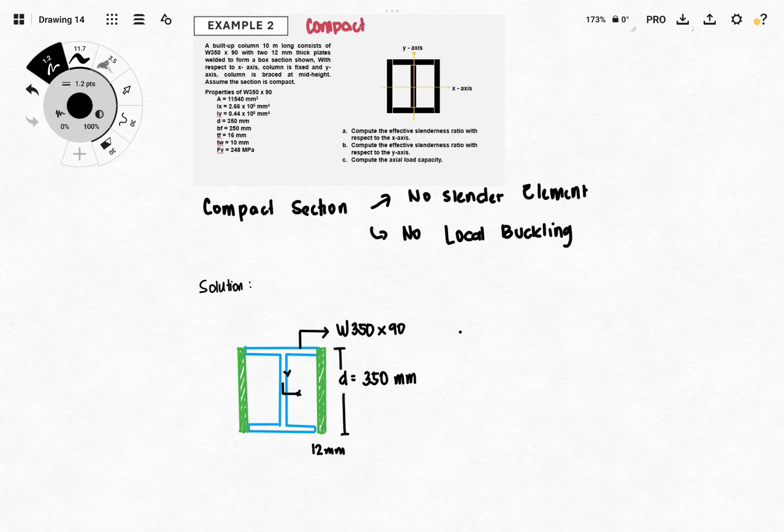Okay, so for our second problem, this is another compact section. We assume no local buckling happens first. So if this happens, all elements of the wide flange, and since this is a built-up member, the plates on the sides are also compact, so they are non-slender, no chance of local buckling. Again, the limit state is still general buckling or yielding. For these kinds of problems, if it's a short column, yielding is the limit state, the mode of failure. But if it's a long column, then it's general buckling.

Now, for this problem, a built-up column which is 10 meters long consists of a W350 by 90 with two 12 millimeter thick plates welded to form a box section as shown with respect to the x-axis. The column is fixed on both ends for its x-axis, and for the y-axis, there's a bracing at mid-height. Again, we assume that the section is compact. The properties are also given. So we need to solve for the effective slenderness ratio with respect to the x-axis, compute the effective slenderness ratio for the y-axis, and the third one is the axial load capacity based on the critical slenderness ratio.

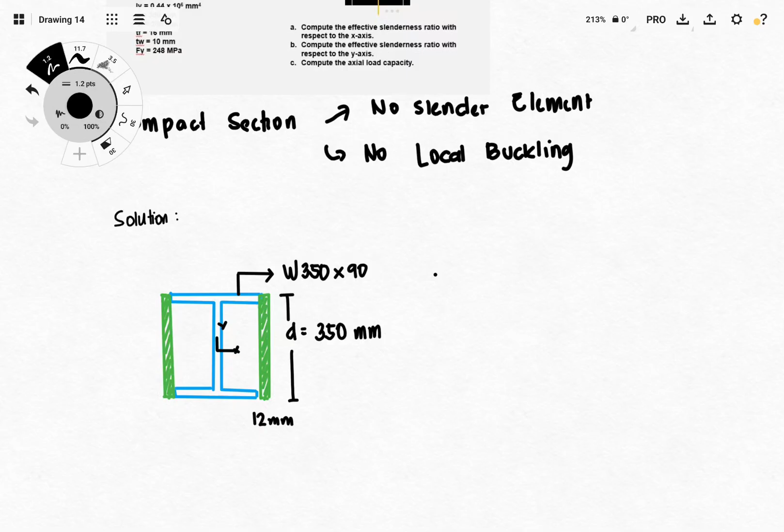So to solve this problem, we need to solve for the built-up properties first in order to get the critical slenderness ratio. Okay, all the information for the wide flange is provided. But now, since it's built-up, we need to include the inertial properties, the area that the plates also contribute.

So for the built-up properties. Okay, so our goal is the formula for slenderness, KL over R. So we need to solve for the radius of gyration, and our formula for radius of gyration is square root of I over A.

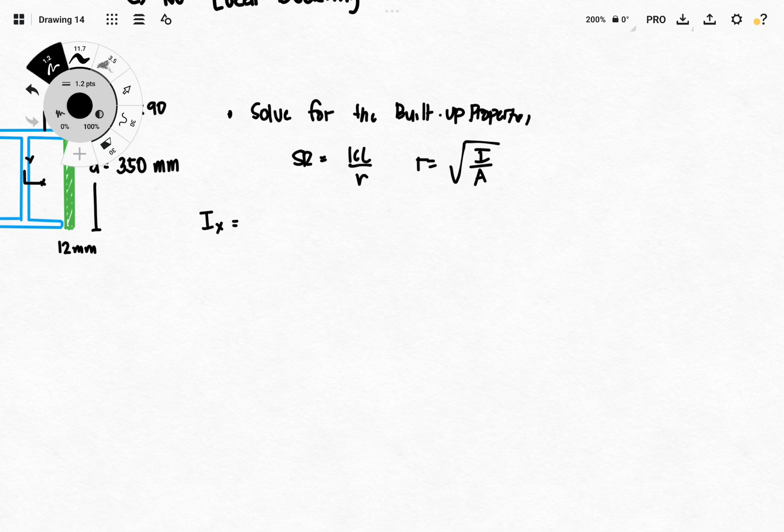Let's get the moment of inertia of the built-up section. So moment of inertia of the wide flange is 2.66 times 10 raised to 6, plus the moment of inertia of the plate. This is just a rectangular shape. We need to solve for the moment of inertia of these rectangular plates. We know that the formula for a rectangular is just BH cubed over 12, or base times depth raised to 3, over 12.

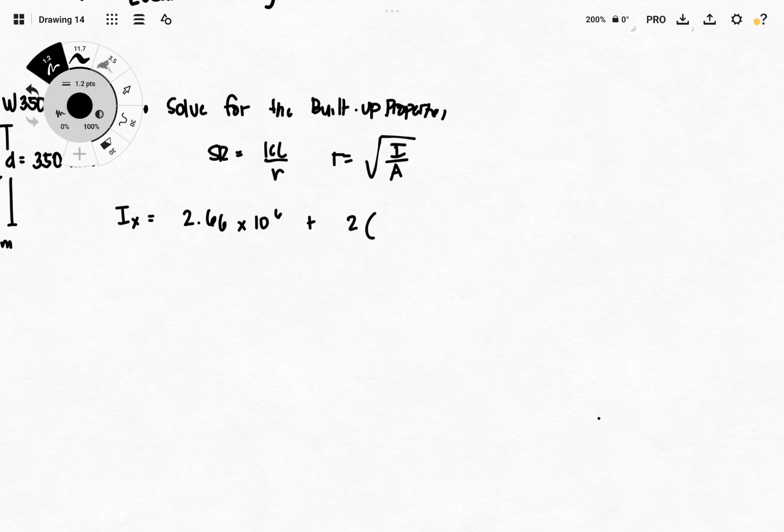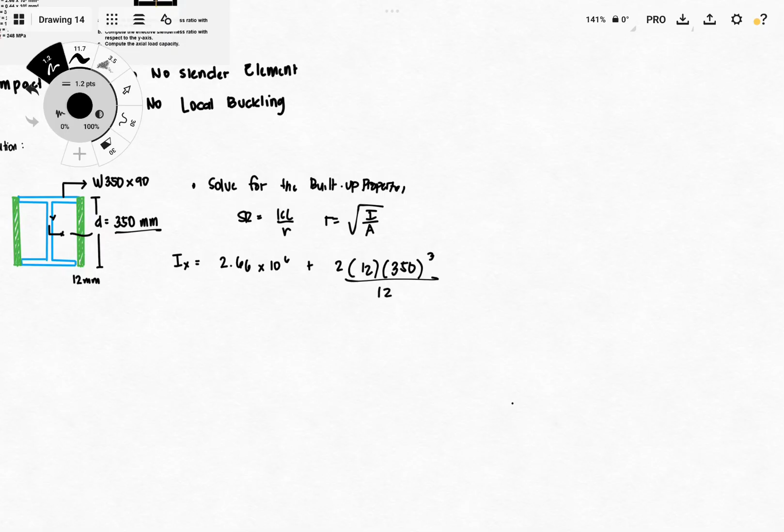But since we have two plates on both sides, that's times 2, 12, and then 350. The problem didn't say the depth is 350, but based on observation, it's the same as the depth of the wide flange. So I put 350 here. Raise it to the 3rd over 12, and solving 2.66 plus that, we get 88.41 times 10 raised to 6 millimeters to the 4th power. So that is for IX.

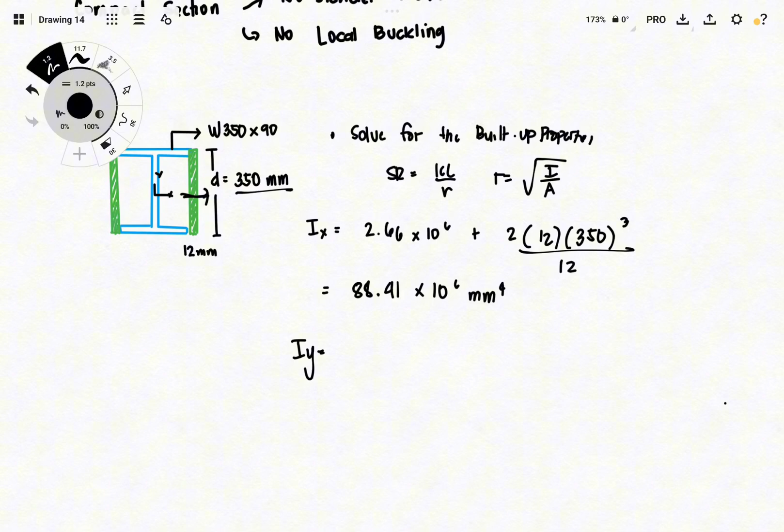Now for IX, there's no transfer formula needed since the centroid of the plates coincides with the neutral axis of the built-up section, symmetrical. Okay, so for the y-axis moment of inertia, again the wide flange value is given, times 10 raised to 6. But for the plates, since their center, their neutral axis with respect to the y-axis, doesn't coincide with the neutral axis of the whole built-up section because it's symmetrical, we need a transfer formula to move the centroidal axis to the neutral axis of the built-up section.

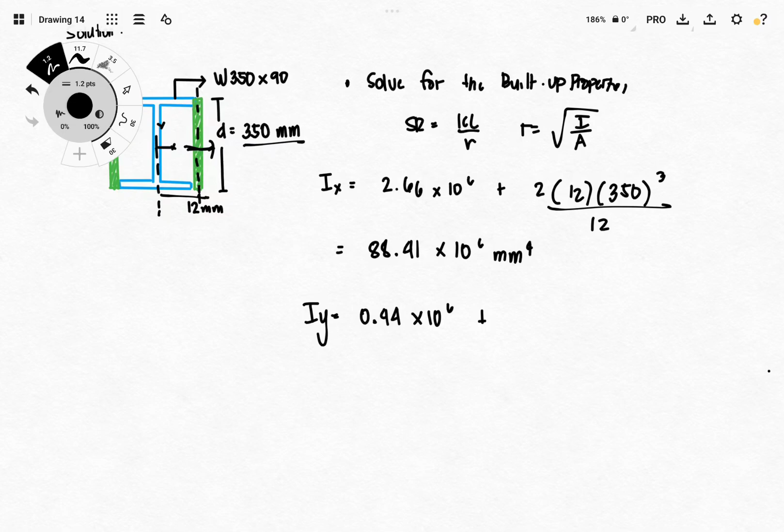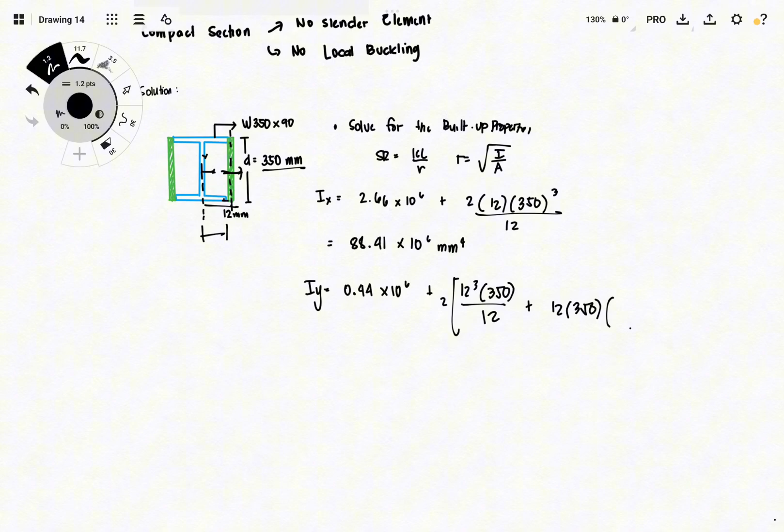Okay, so plus, now the dimensions used are reversed. Our h-cubed is 12 and 350 over 12. Let's factor out the 2, plus the transfer formula, area of this, 12 times 350. No more times 2 since it's already factored out. Plus the distance. For this one, it's half of the wide flange's BF. What is BF? 250. So 125 plus half of the plate's thickness. That's where the centroid is. Since the plate thickness is 12, we divide that by 2, giving 6, and then square it.

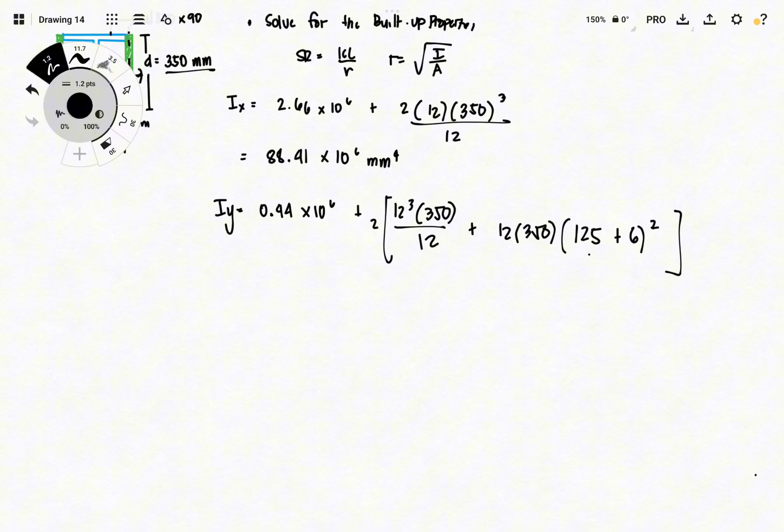Again, using the calculator, we get 144, and this made the y-axis stronger. So based on the moment of inertia, the strong axis is now the y-axis, because of the plates and the transfer formula. So the weak axis is now the x-axis.

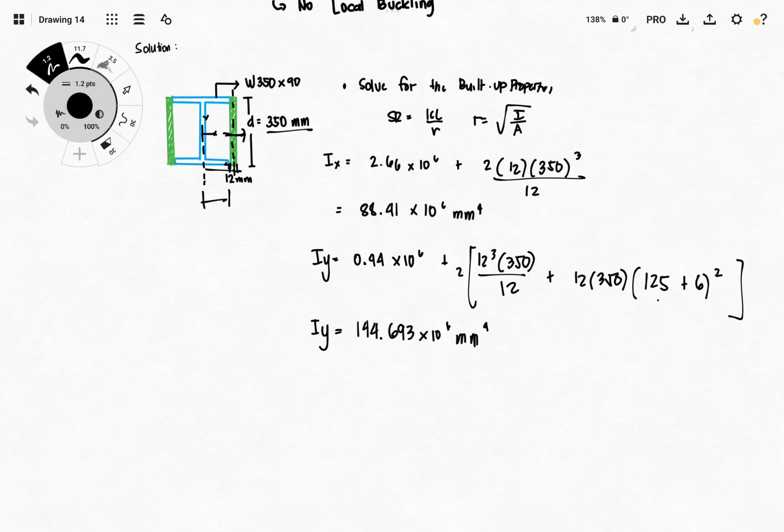Okay, so for the built-up area, let's solve that too. A is equal to 11,540 plus 2 times 12 times 350 for the two plates, giving 19,940 square millimeters. Now, solve for the radius of gyration. Let's start with Rx. Ix is 88.41 times 10 raised to 6, divided by the area, 19,940.

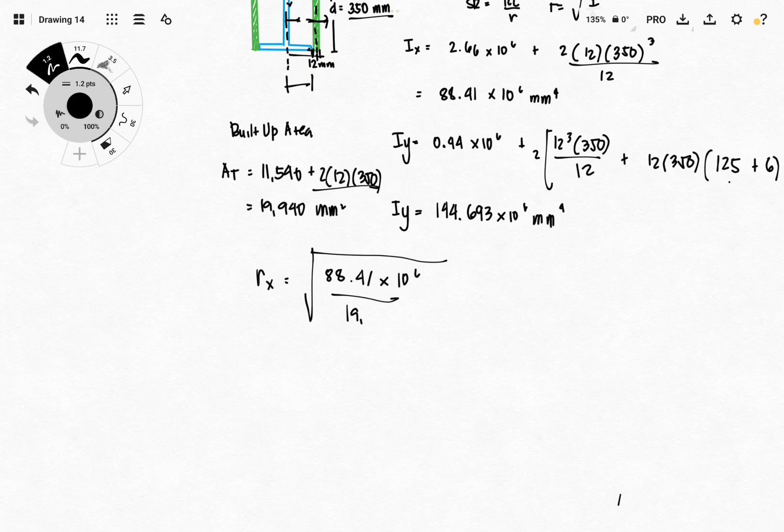So we obtain 66.587. Ang goal natin dito is ma-solve yung Rx. Kung i-observe lang natin yung nakuwang radius of gyration, ang magiging weak axis natin ay yung x. But we are not yet sure kung ano yung magiging critical kasi pwedeng naka-base din sa length.

Yung pagiging slender ng section ay hindi lang naka-base dun sa radius of gyration, pati din dun sa unsupported length and dun sa support conditions. And then for y-axis, we have 144.693 times 10 raised to 6 divided by area, 19,940, so 85.185 yung na-solve natin. Pa-double check na lang na yung mga values na na-solve using your calculator.

Now we can solve for the critical slenderness ratio. We need to identify the K or the effective length factor. Sabi dun sa problem, for x-axis, fix both ends. So since nag-analyze lang naman tayo, we can use the theoretical.

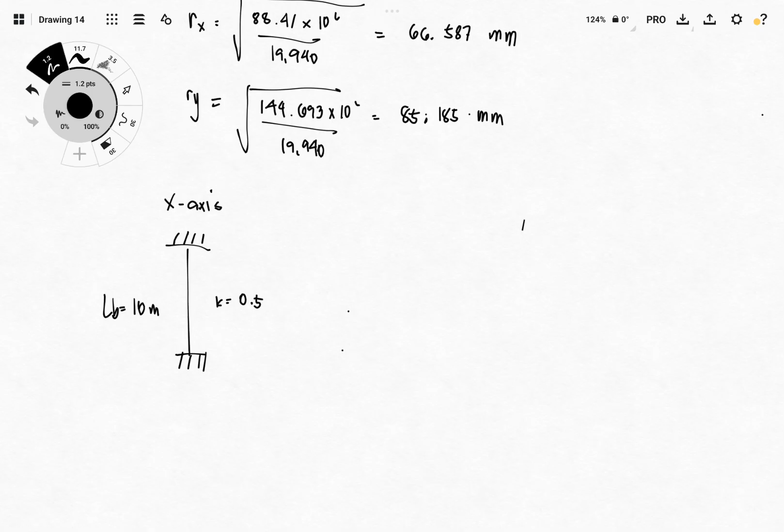LB is equal to 10 meters, the unbraced length. Double check, 10 meters long. And yung K, double check nyo sa table, 0.5 if it's fixed. And for y-axis, it is explicitly stated na meron tayong bracing at mid-height, so the unbraced length will be 5 meters. And the K, if meron tayong pin and fixed dun sa other side, K is equal to 0.7.

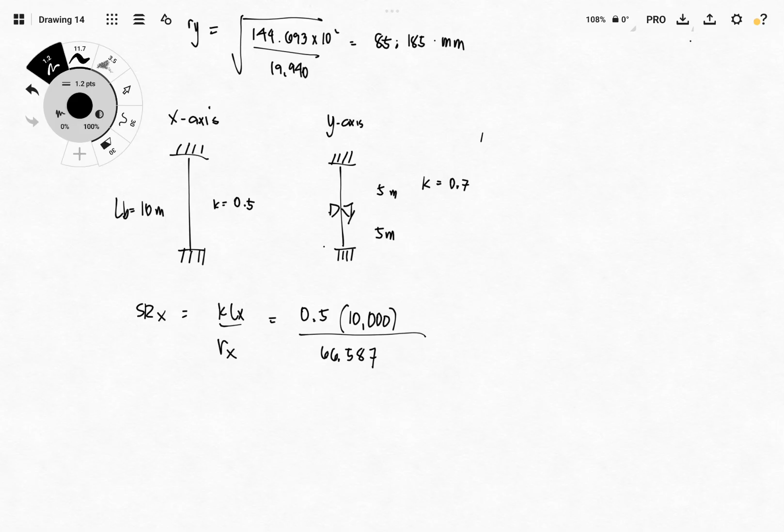Now let's try to see kung saang axis yung magiging slender. Solve natin yung slenderness for x-axis, KLX over RX. 0.5 yung effective length factor, 10,000 yung buong unbraced length, at yung RX ay 66.587. Since this is a ratio, hindi na kailangang may units, slenderness ratio. Okay, so we obtain a 75.09 na slenderness ratio.

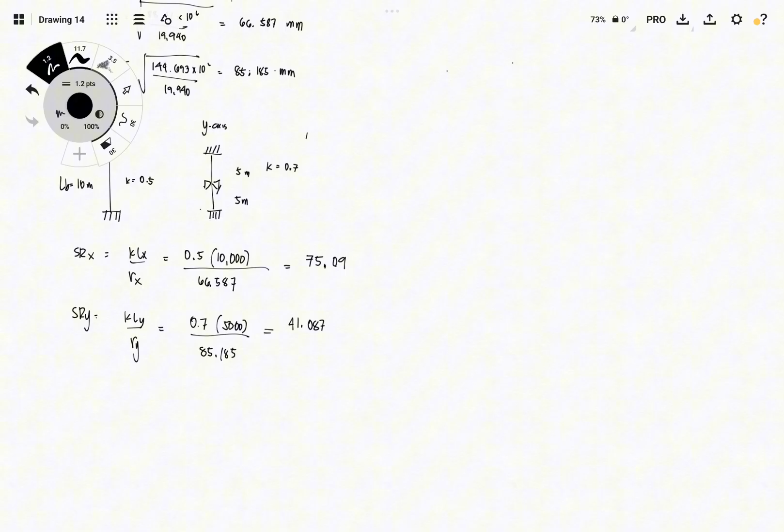And for the y-axis, SRY, KLY over RY. K is 0.7 and the unbraced length for y-axis is half, 5,000, and RY is 85.185. Now solving this, we have 41.087. Now these are the slenderness ratio for both axes, the x and y, and yun din yung kailangan ng nire-require ng question A and B.

So this will be our answer for A. Dalawa na, may sagot na tayo for A and then for B. Okay, so for C, yung required is we need to solve for the capacity, the actual load capacity of this built-up based on the critical slenderness ratio. Now between these two, ano yung gagamitin natin for our design capacity? Yung critical is yung larger value. So yung x-axis yung magiging critical.

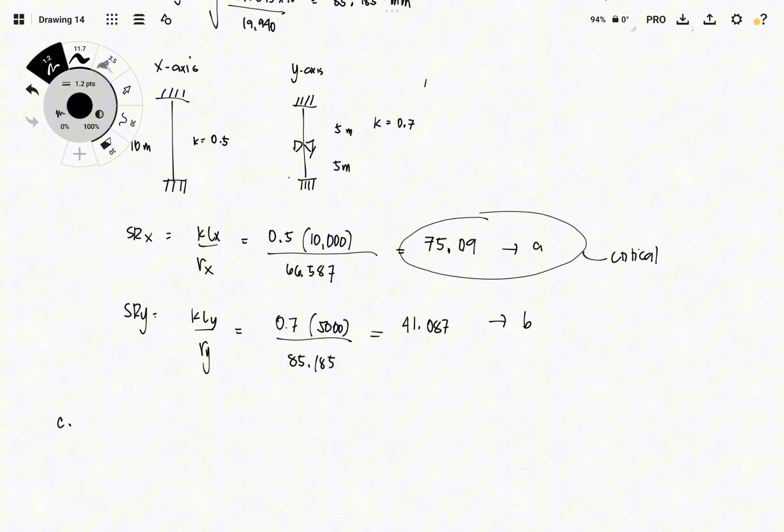So this is the slenderness ratio that we'll be using to solve for its capacity. First we need to identify it will be a short or a long column based on the limiting ratio that we have from your handouts. The limiting ratio is CC. We call it CC, 4.71 times square root of 200,000.

This is the modulus of elasticity over Fy, 248, equals 133.755. Since yung slenderness ratio in consideration natin ay 75.09 and this is less than dun sa limiting ratio, mean to say it will be an inelastic buckling.

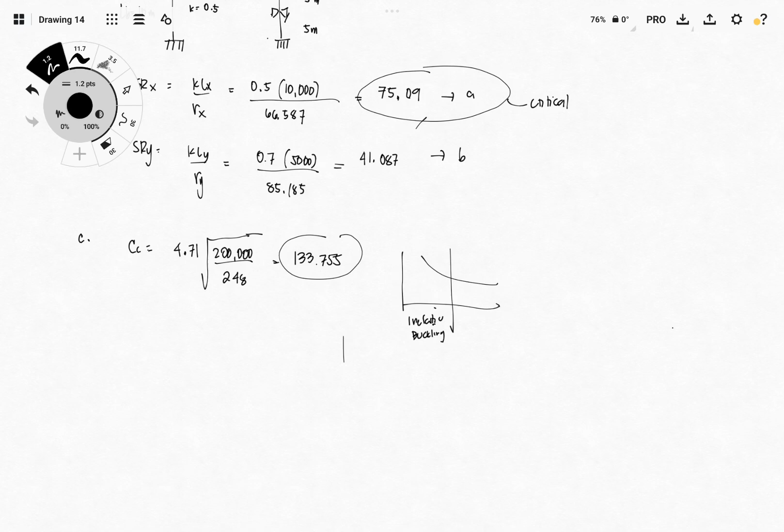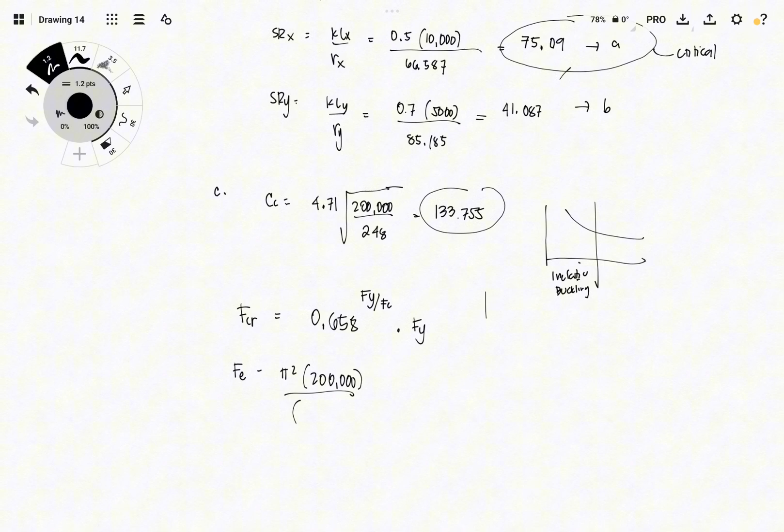So inelastic buckling, we assume na yielding lang. This is a short column or inelastic yung magiging behavior niya. So if this is a short column, then the critical stress for a short column based dun sa code, the formula that we are going to use is 0.658 raised to Fy over Fe, times Fy. Now we don't have the Fe yet, but we can solve this. This is the Euler buckling stress, pi squared E, 200,000, over the critical slenderness ratio in consideration, 75.09, squared, and solve natin.

350.079 megapascal. Okay, we plug in this value dun sa formula for FCR: 0.658 raised to 248 yung Fy divided by 350.079, times 248.

So the critical stress, design stress, 350.079... times 248, and then we have 184.366. Pa-double check na ng class nito yung FCR na nakuha natin.

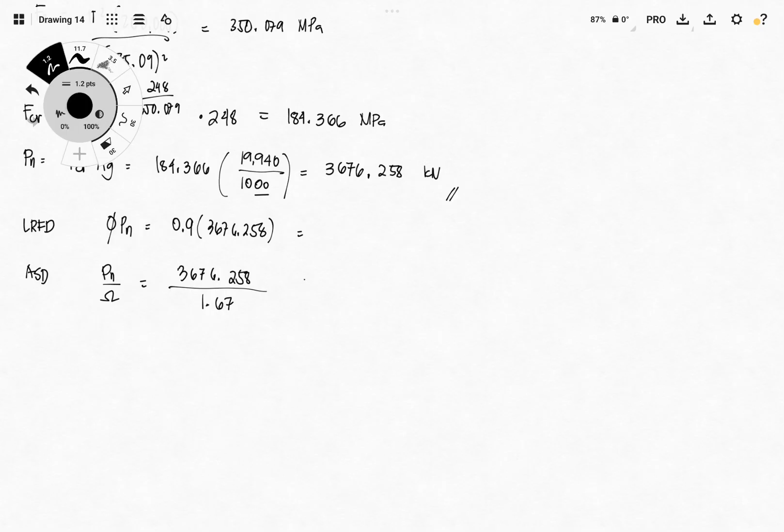And then under LRFD, we just multiply it by a reduction factor. We use 0.9, 3676.258, and if it is ASD, PN divided by the factor of safety, which is the same as yielding dun sa tension member, 1.67. Okay, so solving this, we obtain 3308.63 kilonewton, and for ASD we have 2201.35 kilonewton.

And ito yung hinahanap for C, the third question for the problem.

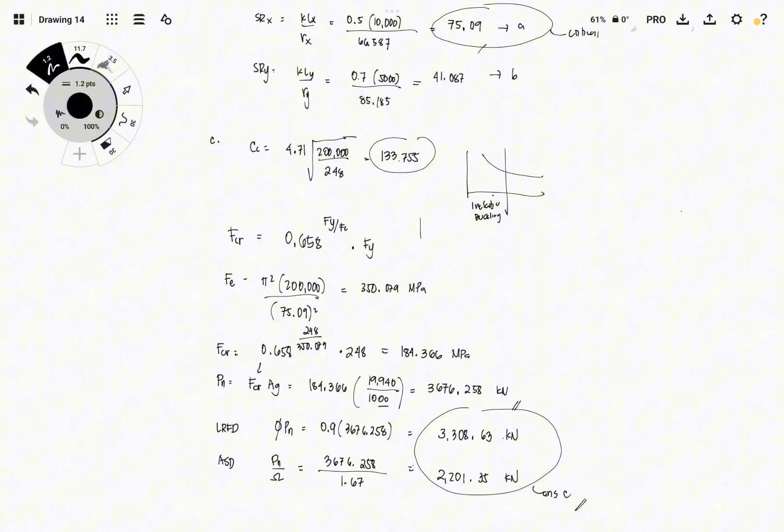Okay, so there's a limit state we need to check for a section subjected to compression. If we have a compressive force that results in compressive stresses, we know that a section is composed of elements, and there's an element that will buckle first, before the whole area or length buckles, which is the general form of buckling. So local buckling means a certain element starts to buckle, wrinkling in that part if it's subjected to compression.

So when that happens, not all of the area is effective anymore. We need to reduce its capacity, wherein we are not going to consider the gross area, but there's a reduction in the area that can support the load. So if the area is reduced, the carrying capacity of our section will also be reduced. For this local buckling, we need to follow section 502.4 to consider those reductions in capacity.

Okay, so here's the concept of compact, non-compact, and slender. We need to check the ratio, the width to thickness ratio, of the flange and the web. Our flange can be categorized as an unstiffened element. If you have an element where one side is free and the other is supported, that's still considered unstiffened. At least one point or end of an element being unsupported makes it unstiffened. But if both points or both ends of a rectangular element are supported, then we call it a stiffened element, and that's commonly our web, which we consider as stiffened element.

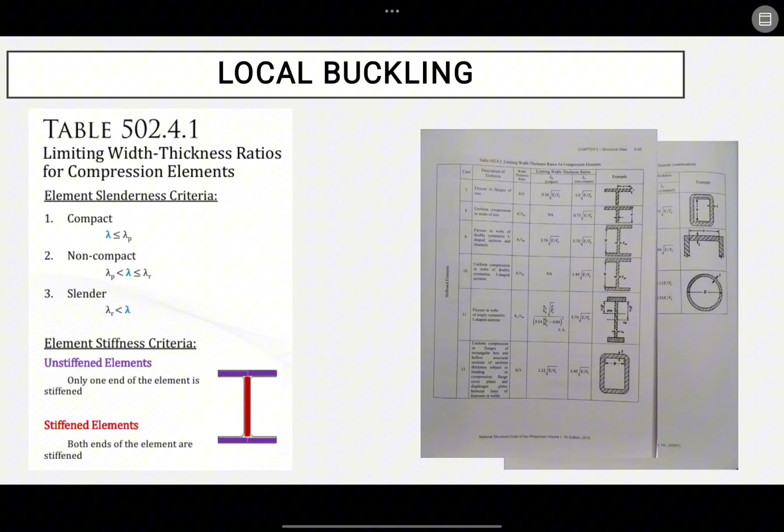So again, these are the limiting ratios, you can see on the right, the table, this is the width over thickness. If the actual width over thickness ratio is less than what's provided in the table, based on the type of section, or whether we're considering a stiffened or unstiffened element, if the actual lambda, that ratio, is less than lambda p, then we consider it compact, and the capacity will just be the same as in our previous examples. If it's in the range of lambda p to lambda r, then that is non-compact, but for non-compact we also follow specific rules or design criteria. And slender, meaning the actual ratio is greater than the limiting ratio for slenderness, lambda r.

Okay, so these are the different classifications, different types of stiffened or unstiffened elements. We say the stiffened element is S and the unstiffened element is U. First, we have an angle bar with a length B, both legs. For a single angle, both legs become unstiffened elements because one end is supported and the other ends are not supported, so both legs of the angle bar are unstiffened elements.

And if we have a T-section, the whole wide flange, its length we consider as half, and the whole flange, that's two elements. So for one element, one side is supported, the other end is not, so we still consider it as an unstiffened element. So all elements of a T-section are unstiffened. But for a wide flange, we have four elements that are unstiffened and the web is a stiffened element. And then for a box section or hollow square section, all elements are stiffened.

Now we have separate criteria if it's a stiffened or unstiffened element. And if it's a built-up section, we have added cover plates, so what's considered a stiffened element can change. So first, if we have a T-section again, as repeated, the wide flange's flanges will be unstiffened, and also the web of a T is unstiffened. If we have a cover plate, the whole wide flange becomes stiffened, even the flange, but our cover plates will be unstiffened.

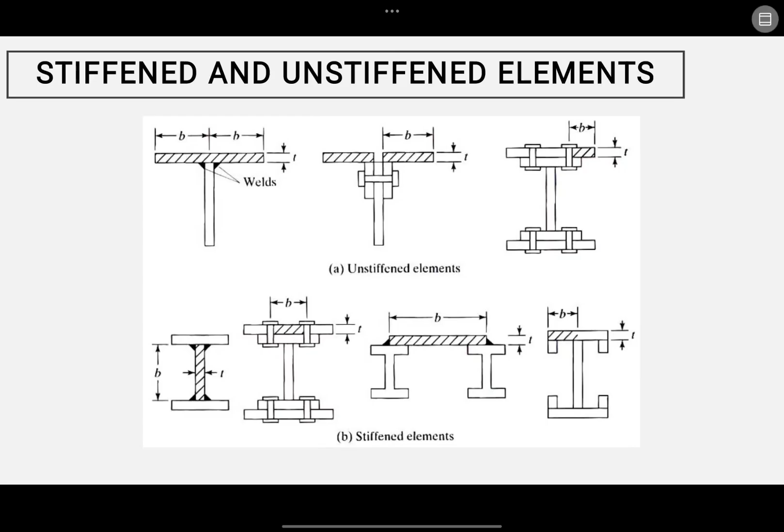So this is the table we are going to use. For case 1, this is the common case, where for wide flange, for T-section, for channel, we have to use this limiting ratio. For compression, we don't have lambda p or lambda r separately, so it's only lambda r that we have. So it's either slender or non-slender.

No, kasi sa flexural members, meron tayong compact and non-compact, so dalawang ratio na kailangan i-check. But for compression, isang value lang. So different values for an unstiffened element and different set of limiting ratio for stiffened elements.

For flanges, case 1, 0.56 kailangan nating gamitin. Yun yung gagamitin natin, hot roll, o yung mga hot roll sections. For the second, ito yung mga built up. Kung meron kayong tatlong plates, as ginawa nyo siyang isang I section, then we say it's a built up section.

Now for a built up section, 0.64 naman yung gagamitin. And kung mapapansin nyo din sa formula, merong Kc under the square root. At yung Kc na yun, yung formula niya ay nandun sa notes, 4 over square root of h over tw, which is the width to thickness ratio ng webs.

For a single angle, yung case 3 naman yung gagamitin. Double angle, ganun din. For stems of T's, now we have this: sa stem ng T's, 0.75 square root of e over fy. And for stiffened element, yung ginagamit natin for the webs, ito yung common na 1.49. So for a typical hot rolled section, ang limiting ratio na gagamitin for the flange is 0.56 square root of e over fy, and then for the web, yung 1.49, and then we use h over tw. So later we are going to have an example.

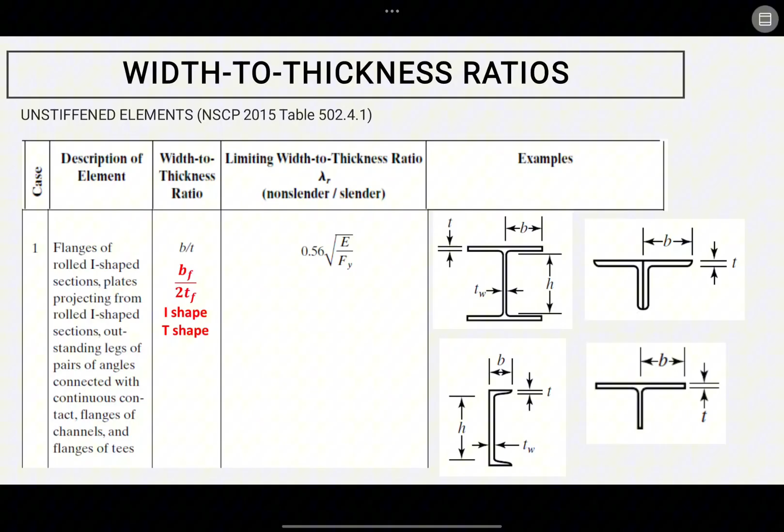Okay, so again, mas na-emphasize lang dito yung mga formulas. For case 1, we use 0.56, and this is applicable for the flange of the wide flange, the flange of the T-section, flange of the channel, so we'll be using this ratio. And then if it is a built-up section, if it is stated sa problem na built-up yung wide flange natin, then we'll be using 0.64, and there's a Kc in the formula. The Kc is based on the width to thickness ratio ng web natin of the wide flange, so h over tw. So legs of single angle, we use 0.45, stem of the T's.

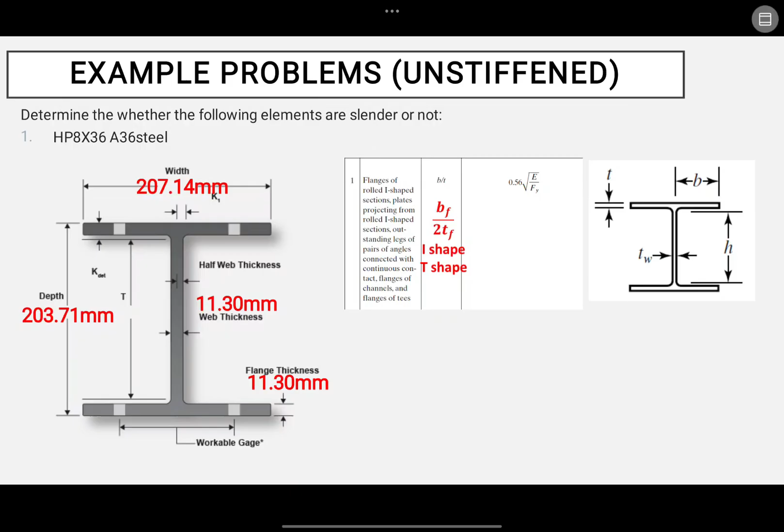Now you can use this as a practice, no, to solve for the actual ratio, and we can check kung stiffened or kung slender or non-slender yung element. So this is for the single angle.

Okay, so ano yung gagamitin nating H? H is the difference, no, if given yung D, this is the total depth of the wide flange. Yun yung usual na given, D minus 2K. If hindi given sa problem yung H, then you have to solve it using D minus 2K. Pero if hindi given yung K, you can assume yung TF, no, yung thickness ng flange. So D minus 2TF pag hindi given yung K. So if D yung given, yung total depth ng wide flange, then you have to solve for the H.

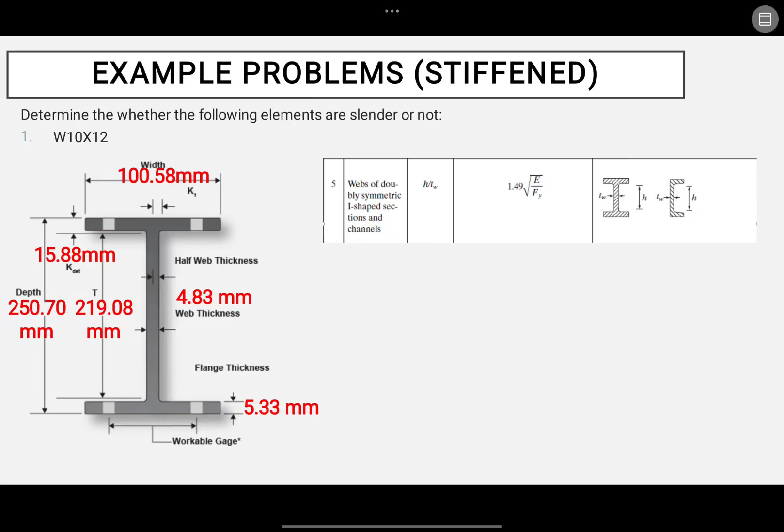If hindi given yung H, and if hindi given yung K, you can use the thickness of the flange. So some other formulas. So this is just an example on solving those ratios.

Now if na-confirm natin na merong slender na element, then magkakaroon tayo ng reduction factor na Q. And this Q is applied to the limiting ratio. Yung 4.71 or yung CC natin magkakaroon ng Q dun sa FY, and yung FCR magkakaroon ng Q, dalawang beses natin siya i-apply. So ano ba yung magiging value ng Q?

Okay, so the value of Q, this is the product of QS, QA. If yung web ninyo ay slender and then yung flange ay slender din, so yung Q natin will have this formula, QS times QA. And for the values of this QS and QA, we need to refer to the section. So section 505.7.1 if slender yung flange, and section 505.7.2 if slender yung web. And if hindi slender yung web natin, we use 1, and then yung QS lang yung mababago, magkakaroon ng factor. Ganun din if yung web lang yung magiging slender. So basta yung pinaka-value ng Q depends on these sections.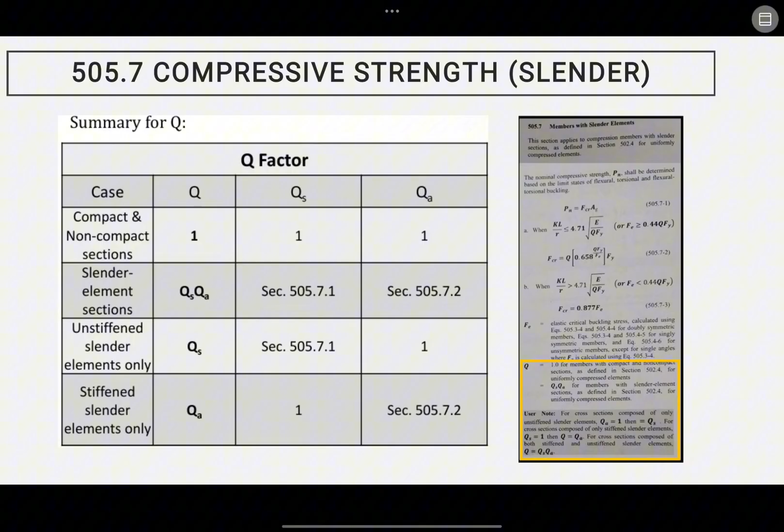So for QS, ito yung gagamitin nating section to solve for QS. We need to prove kung ano yung condition. We have 3, pero yung pinaka-common for wide flange, yung case 1 lang. Yung number 2, this is for built up. And for single angle, yung number 3. And number 4, meron pang number 4, this for the stems and tees, ito yung gagamitin.

And for QA, we need to refer to section 505.7.2, and yung formula for QA will be A effective over A. So we need to make sure na yung area effective should be less than dun sa area. Kasi kapag greater than, we need to use 1, walang reduction factor. Ang goal kasi natin, dapat may reduction talaga siya. Pero kung wala, bawal siyang karoon ng increase. It should be a reduction. So will be sticking to its original area. But if na-confirm natin na merong reduction, then we need to use this QA and then corresponding area effective.

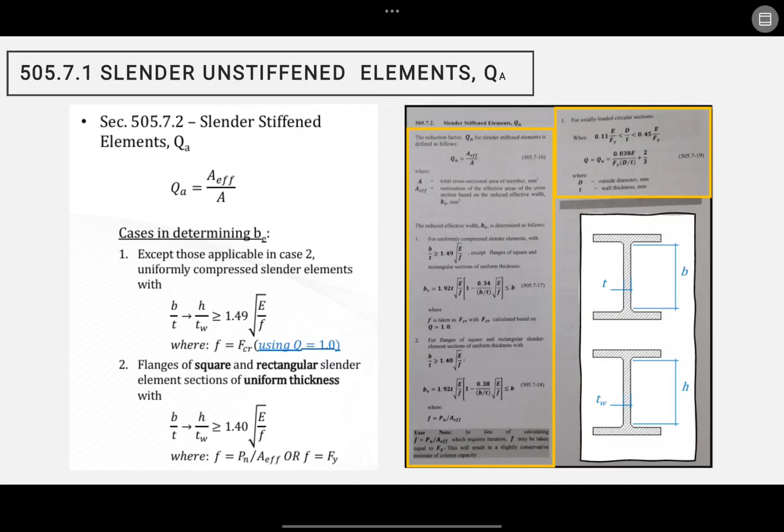Ano ba yung kailangan nating i-reduce? Yung depth ng web natin, marireduce siya. So using these formulas, later we are going to have an example about that.

Okay, so this one, we solve example number 3. We need to determine the nominal strength and factored strength of the given section used as a 2.4 meter high column having pin connections at both ends.

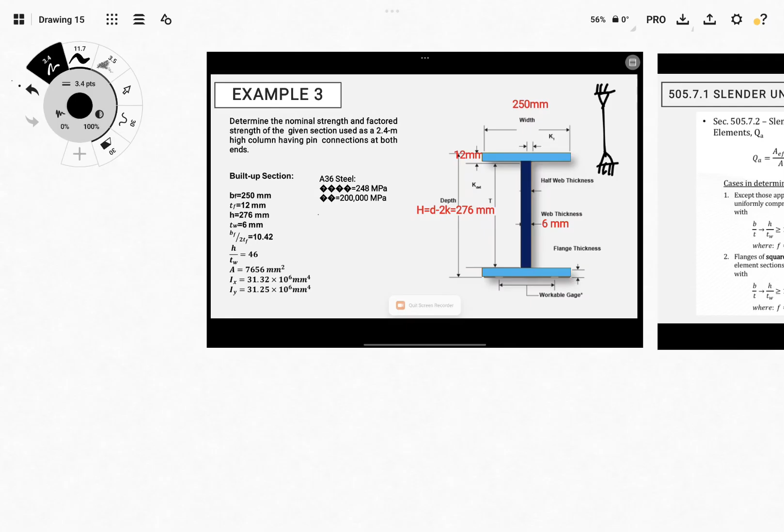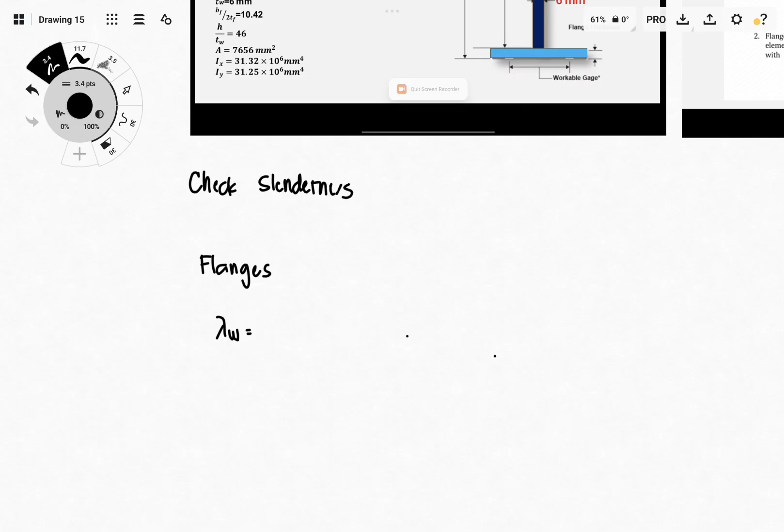Now for this problem, it's not stated if it's compact. Therefore, we need to check if we have an element that is slender or non-slender. So we need to solve for the actual width to thickness ratio, the lambda. We need to check slenderness, first the flange, since usually the flange is checked first. So for flange, the actual width to thickness ratio is lambda W.

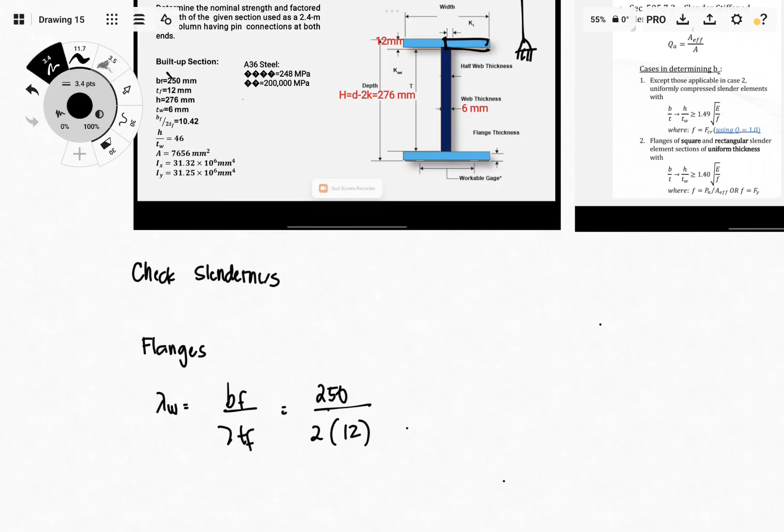So for this one, our formula is BF over 2 since this is one element. So we divide BF by 2. For this problem, BF is 250, so BF over 2TF, which is 250/2 over the thickness of the flange. Let's solve this: 250/2 times 12, I obtain 10.42. So that's our actual ratio.

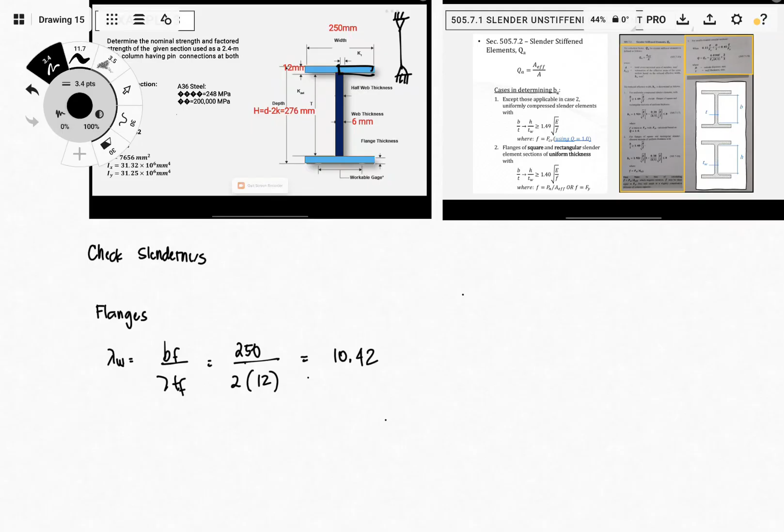Now we need to compare it with the limiting ratio from the table. But double check if it is hot rolled or built-up, because if it is hot rolled, for flanges we use case 1. But if it is built-up, then case 2 is used. For this problem, it's stated as a built-up section, so for flanges or unstiffened flanges, we need to use case 2.

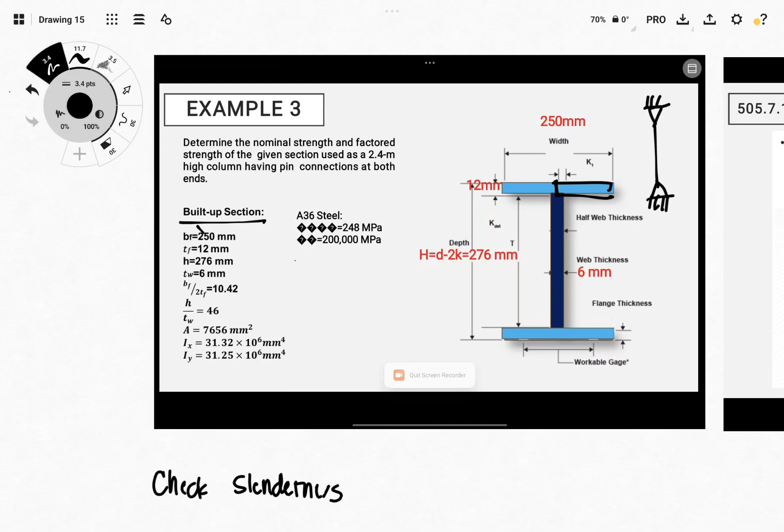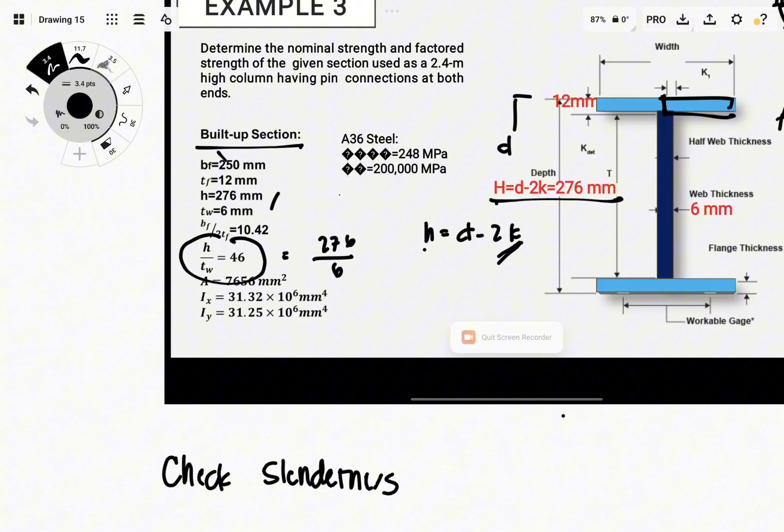From the formula, the ratio we need to use is 0.64 and there's a Kc. The Kc formula is 4 over square root of h over tw, times E over Fy. The H over TW is the ratio of the web. Since in the problem it's given, H over TW, but if not given, you have to use H as 276 and TW will be 6. But if in the problem what's given is the total depth, it is given as D minus 2K. If D is given, since we'll use H, D minus 2K, make sure K is also given, but if K is not provided, you can assume this as TF, so 2TF.

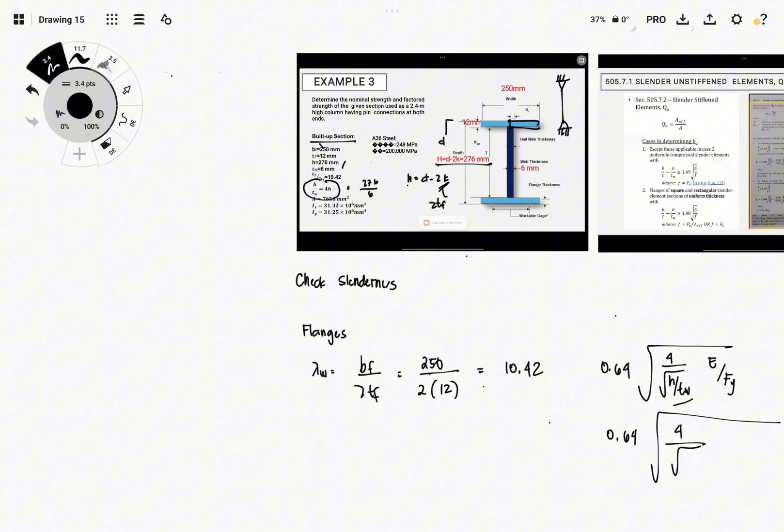Now going back, solving for the ratios, since H over TW is given, we can just plug in the values from the problem. Square root of H over TW, 46, times 200,000, and the Fy given in the problem is 248. Using your calculator, double check the values: 0.64 square root of 46 times 200,000 over 248, then we have 13.958. Please double check the values we are getting.

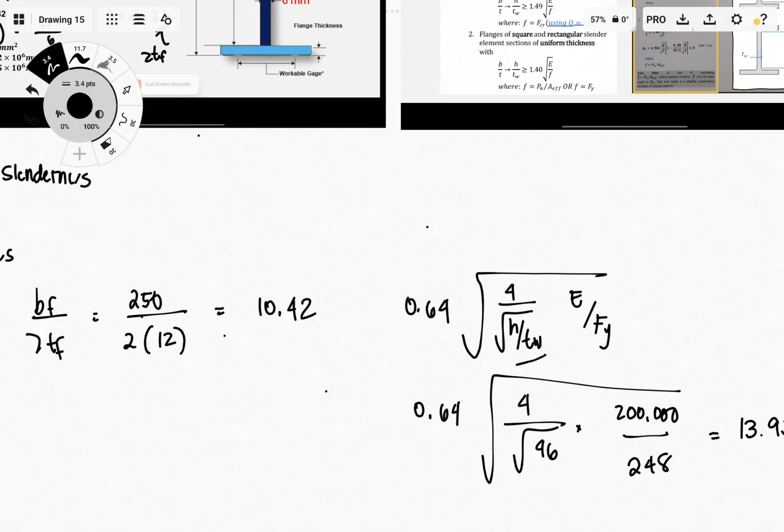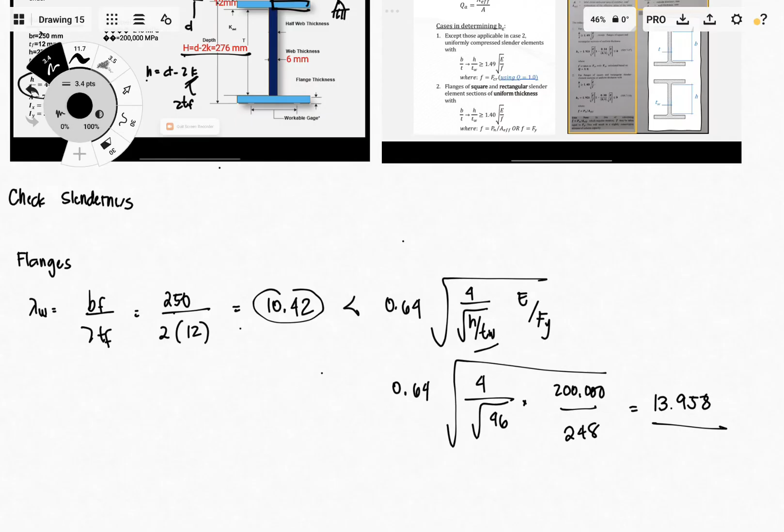Okay, in the problem the ratio is already given even if we don't solve it, but I showed how we check the lambda W. So let's compare 10.42 and 13.958. The actual is less than the limit. If less than, the web is not slender - I mean the flange, or the unstiffened element. Flanges are the unstiffened elements. So flanges are not slender.

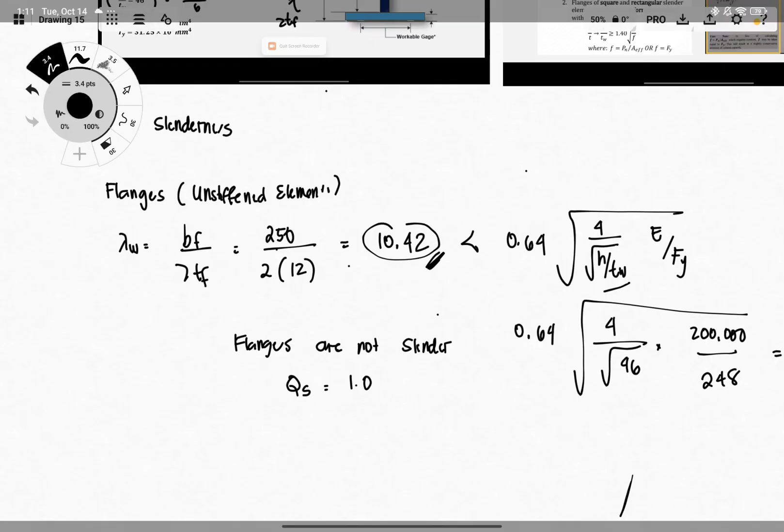If the flanges are not slender, therefore the QS, the reduction factor for unstiffened element or for flanges, will be equal to 1.0. But if greater than this ratio, if you solve it and get, for example, 14, then we have to solve for this QS. It's not 1, so we need to refer to what's provided by the code. But we're not done yet.

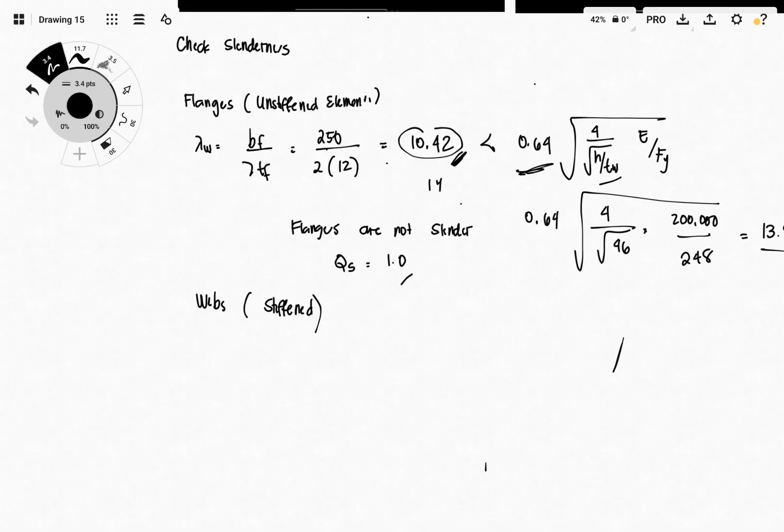So we also need to check the webs, or the stiffened element, of this wide flange. The good thing about the web is the formula used for the ratio will just be the same whether it is built-up or not built-up section. So we have a mistake - these are actually for flanges, lambda F, and for web, lambda W. So the formula will be H over TW - no over 2 here since it's not needed to halve it for the web.

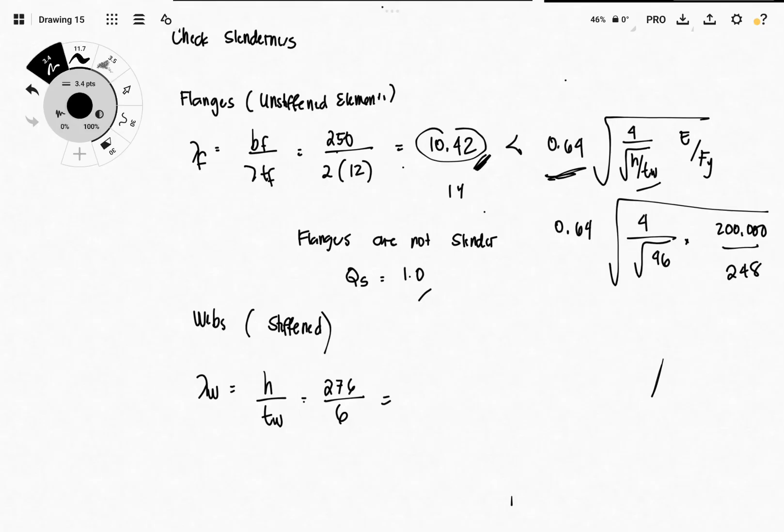So the H used is given in the problem, 276, divided by TW, 6. But in the problem, the ratio is already given - just to show you how it's done: 276 over 6 equals 46, same as given in the problem. Now for our stiffened element, the limiting ratio we're going to use is 1.49 square root of E over Fy. No Kc is needed here: 1.49, square root of 200,000 over 248.

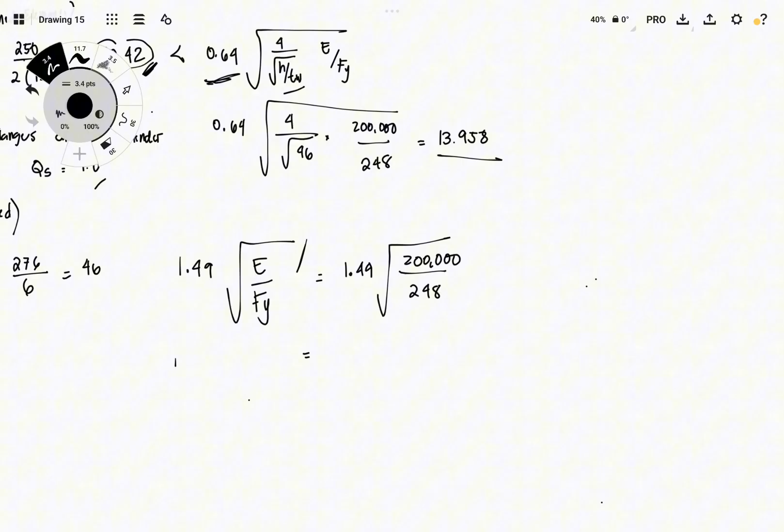42.313. Comparing, the actual is 46 and the limiting value is 42, so it is greater than, it exceeds. There's a tendency for our web to buckle, it will have local buckling. So since it exceeds our limiting ratio, we can say that the web is slender.

Then we have to use QA. We need to adapt the provisions, the formulas from the code if the web is slender. So what is going to be the value of QA?

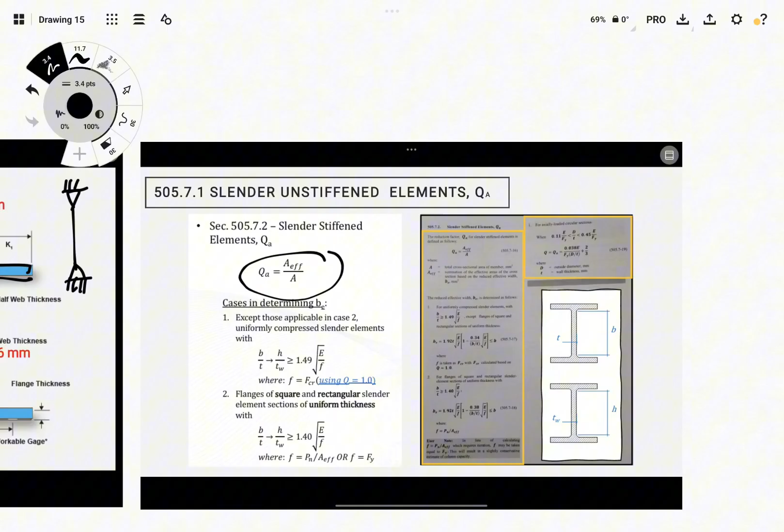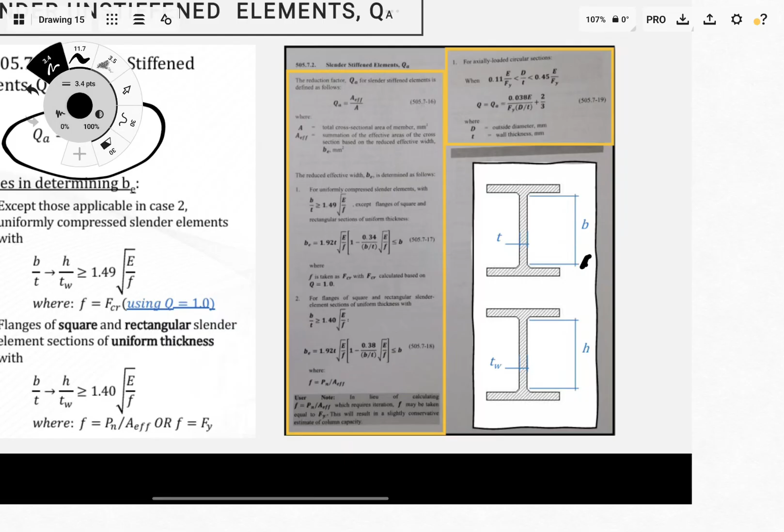So QA, we need to refer to section 505.7.1 and we will be using this formula for QA. So the formula, we have this to determine the effective B. B is what this refers to, but since we're considering the web, this is it. So we need to solve for BE because if we prove that it's less than the BE of the original depth of the web, then we can use this value, the lower value compared to the actual.

It's like this: if our actual H now is 276 and what we solved as effective using these recommendations by the code is 270, then we can use this. But if the effective we solved is 280, we need to return or go back using this H. So it's like no reduction happened, and eventually the QA value will just be equal to 1. But if it is less than the original 276, then it will have a value less than 1.

We'll have a reduction. Definitely, it will definitely have a reduced value, because our gross area will reduce too. It becomes the effective area.

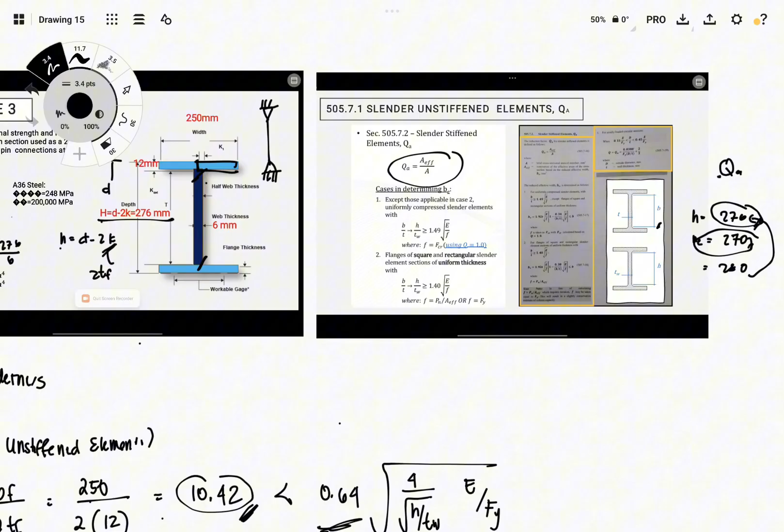So for this one, which case do we use between the two? For case 1, except those applicable in case 2, uniformly compressed slender elements. Case 2 is flanges of square and rectangular slender element sections of uniform thickness. So it's not flanges that we're considering. We consider a section, the web. The web is what we're considering, not the flanges.

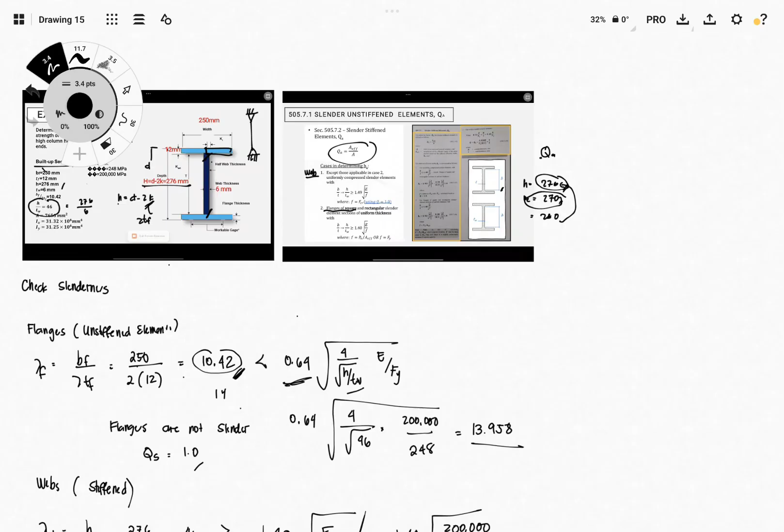So we'll be using case 1. Since our value exceeds the 1.49, then this case is applicable. We can use Q equal to 1.0.

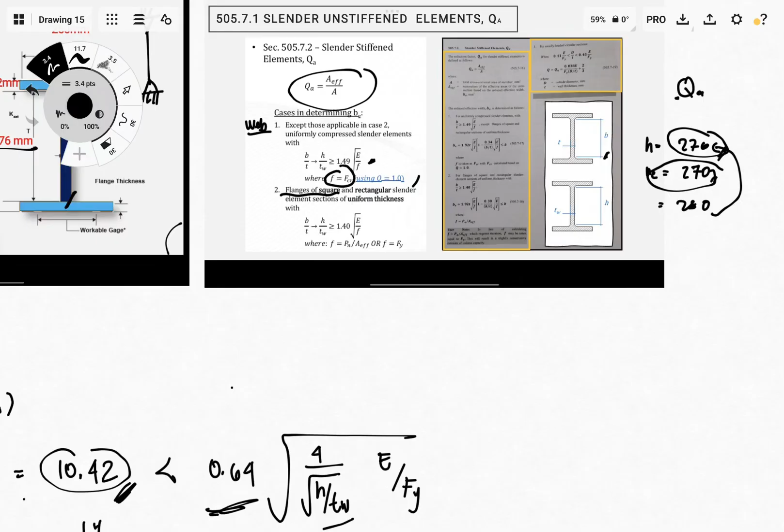What is F? F is equal to FCR. We need to solve for F first to confirm if this case is applicable. So F is the actual ratio given that our Q will be 1.0 for now. So we need to solve for F.

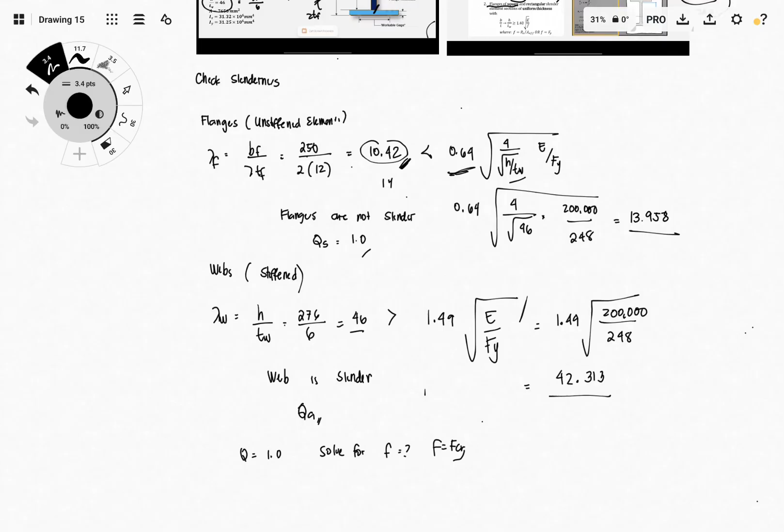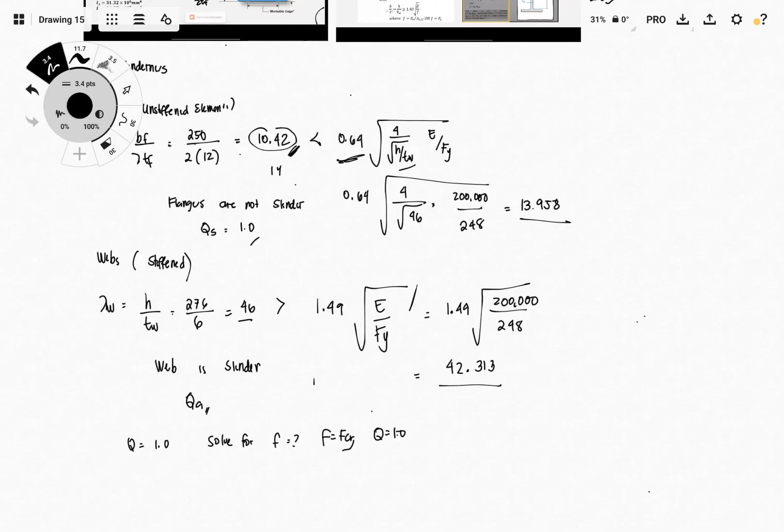So the normal formula, the general formula that we use. First, we need to determine the critical slenderness ratio, KL over R. What are our support conditions? Pin connection, no bracing mentioned, so KL over R. We use K for pin connections at both ends. The length is 2,400.

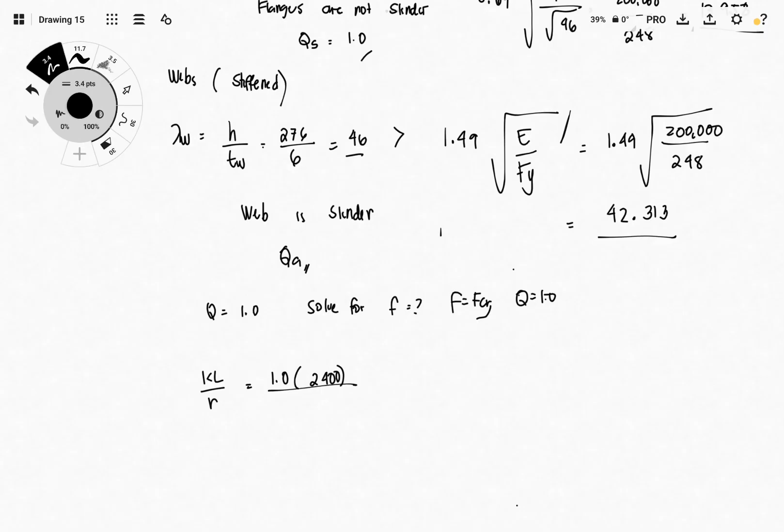What is going to be the value of R, the radius of gyration? Since this is not a built-up section, the critical or weak axis is the smaller one, the axis that has the smaller value of moment of inertia. For this one, given in the problem that the smaller is 31.25, we can solve for the radius of gyration since that's what's needed in the formula, we don't need to solve Rx, just Ry.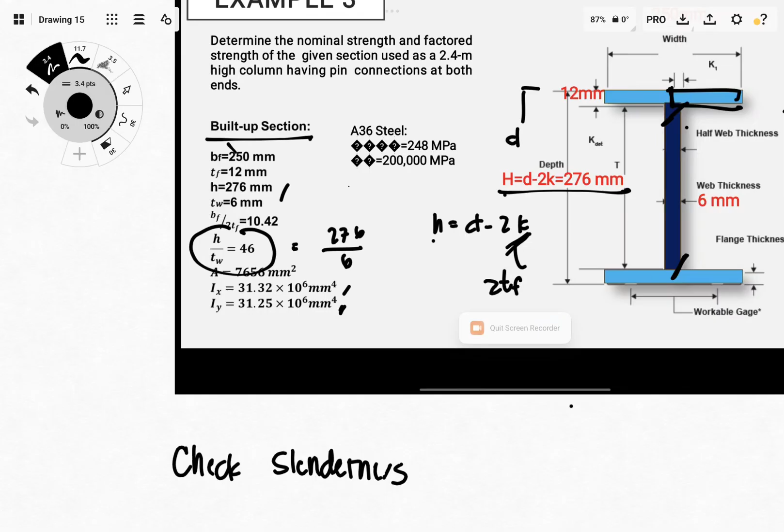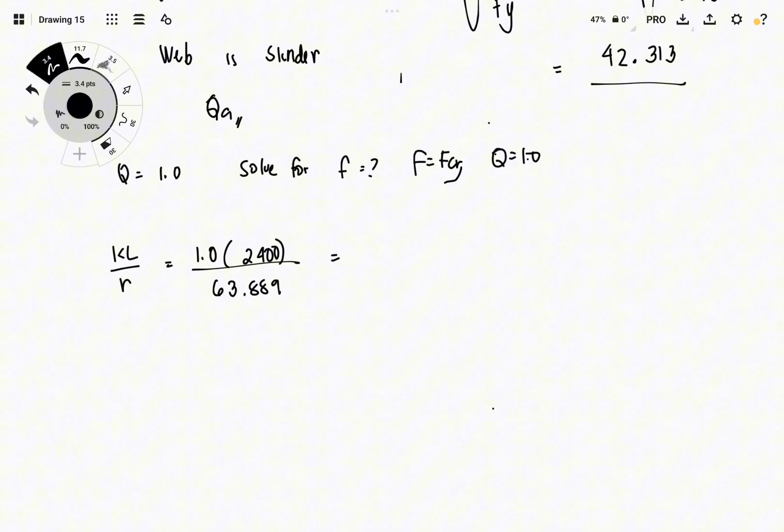So for this problem, radius of gyration about the y-axis, Iy is 31.25 times 10 raised to 6, divide by area, 7656. Solving this, 31.25 times 10 raised to 6 over 7656, and the Ry is 63.889. 63.889 is less than 200, and then solving this, 2,400 over 63.889, we have 37.56, less than 200. Then this is an acceptable value.

Now if that exceeds 200, then you need to change the section. That is not an acceptable slenderness ratio. Now solving this, this is our ratio, and to solve for the FCR, we need to identify if it's a short or long column, comparing it to the CC, 4.71, 200,000.

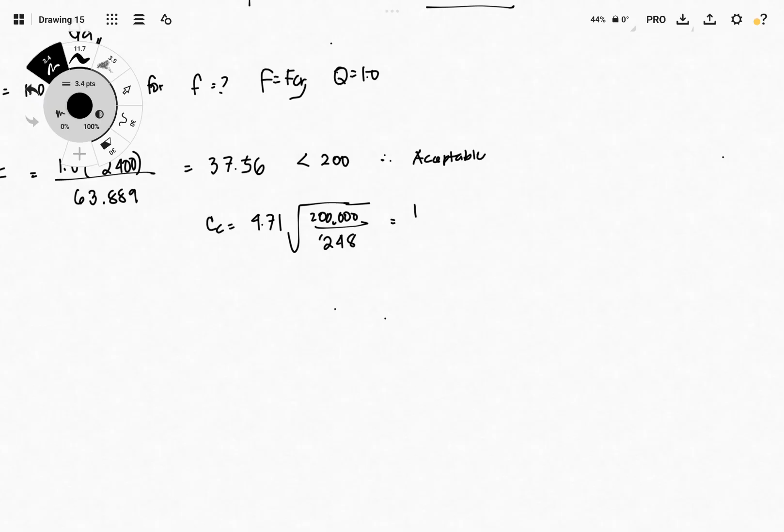For now, we are going to assume that Q is 1.0. So our FY in the problem is 248. 4.71, 200,000, 248. So 133. This is a short column.

Now, short column, we know that our formula for short column is FCR equals 0.658 raised to FY over FE, times FY. So there should be a Q there, but we assume that Q will just be equal to 1.0, we don't have the value of FE yet.

Our FE will be equal to pi squared times 200,000, and the slenderness ratio we solved, 37.56, squared. So solving for the Euler stress, 37.56 squared. So what I got is 1399.20 megapascal.

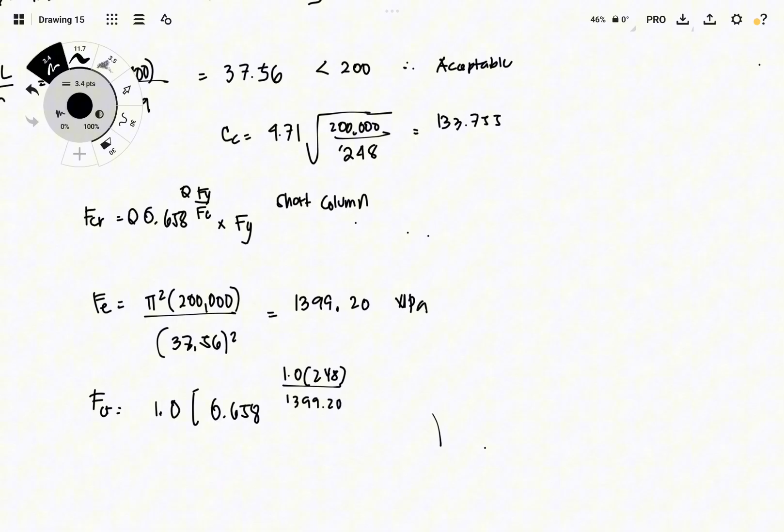Then we plug in this value to the FCR formula. So 1.0 for Q, 0.658, 1.0, 248, and the FE we got, 1399.20, times 248, we have 230.27 megapascal, and that's going to be our F.

Okay, so going back to 505.7.2, we need to confirm if it's still greater than 1.49 to satisfy our conditions. 200,000 over F, but not FY that we use, but the FCR we solved. And this is going to be the F, 230.27.

Ito yung first step na if yung web yung magiging slender, 43.911. At since yung actual natin na H over TW is 46, yung nakuha natin kanina, nag-exceed siya ng 1.49, check natin dun ulit sa code.

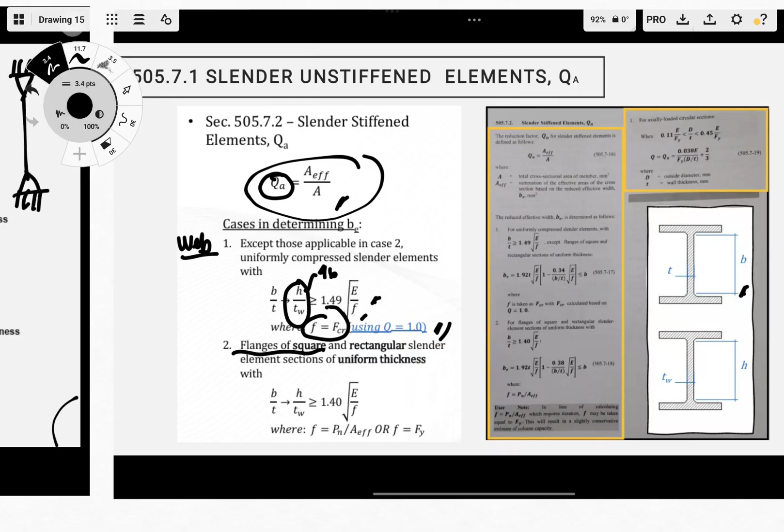Now, we can use this. Pwede lang natin pala siyang magamit if yung QA magagamit natin to if yung H over TW natin na 46 ay nag-exceed dun sa 1.49 square root of E over F. Now, the value, if na-prove natin yan, na nag-exceed siya ng 1.49 square root of E over F, then the effective, yung magiging bagong depth ng web natin in consideration will be equal to this. Ito yung gagamitin nating formula. Kaya we can use HE, effective depth ng web instead of BE, since yung web naman yung kino-consider natin.

So we use this HE, and then from the formula sa code 1.92 TW E over F, pa-double check na lang ng formula, 0.34 over H over TW E over F. So plugging all the properties, TW 6, 200,000, and yung nasolve natin considering Q is equal to 1.0 230.27.

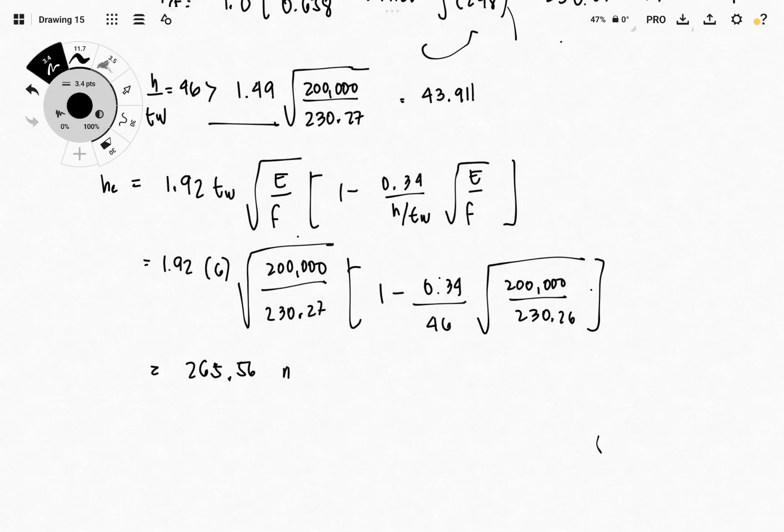1 minus 0.34 over 46, 200,000, 230.26. So we can get a value of 265.56. Ito yung nakuha natin. And this is less than dun sa H original natin. Yung H actual is 276.

So since less than siya, we can use this. Magkakaroon ng reduction. At yung Q natin will not be equal to 1 or will not exceed sa value ng 1. Therefore, yung effective na area ng built-up I section natin will be equal to area effective. Ito na lang yan, yung magre-resist na, reduce na. Pero yung buong flange, buo pa din yan. Yung buong flanges natin, yung web lang yung magkakaroon ng reduction.

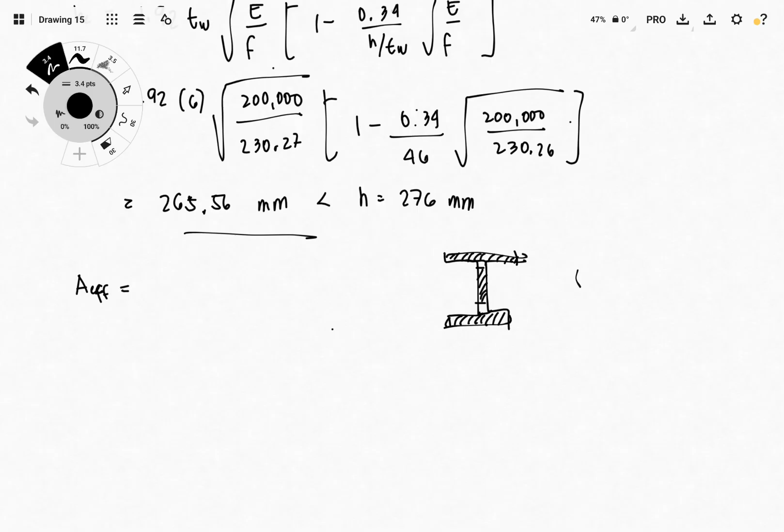So the formula will be equal to buong flanges, yung dalawa, sa taas at sa baba, plus A effective ng web. So 2 times 250 over 12, 2 times 250 times 12 plus 265.56 yung nasolve natin, times thickness ng web 6. Solving this, plus 265.56 times 6, 7593.36, which is less than dun sa original na area.

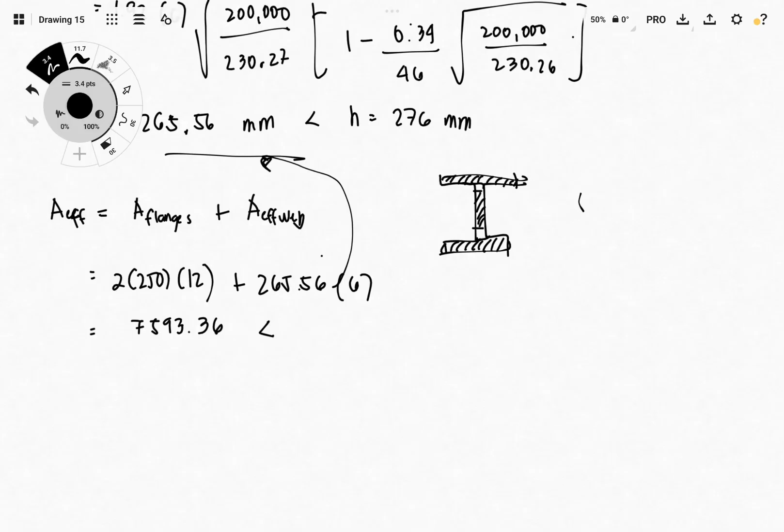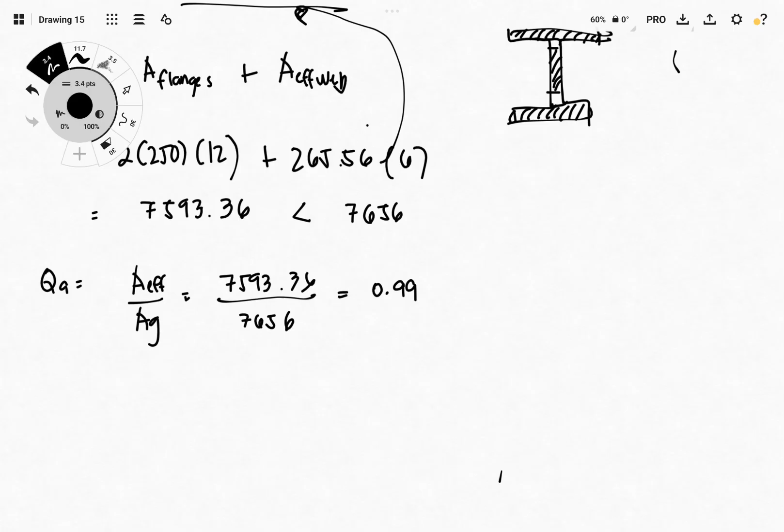7656. Now, the value of QA will be equal to AF over yung original na area gross. AF is 7593. Okay, so solving this, you can get a value of 0.99. Yun lang naman yung goal natin. Dapat less than 1 yung makuha para magkaroon ng reduction.

Now, for the overall, yung value ng Q, QS times QA, since yung flange natin na hindi naman slender, 1.0 yan, pero yung QA is 0.99. So ito yung gagamitin na Q dun sa formula. Now, we need to recalculate the stress FCR and then the capacity of our slender built-up section. Now, we need to check again kung short or long column siya by considering the limiting ratio and this 0.99 na reduction. So again, CC will be equal to 4.71 square root of E over Q Fy. So yung Q natin will now be 0.99. Let's see kung significant yung effect niya. So Fy is 248.

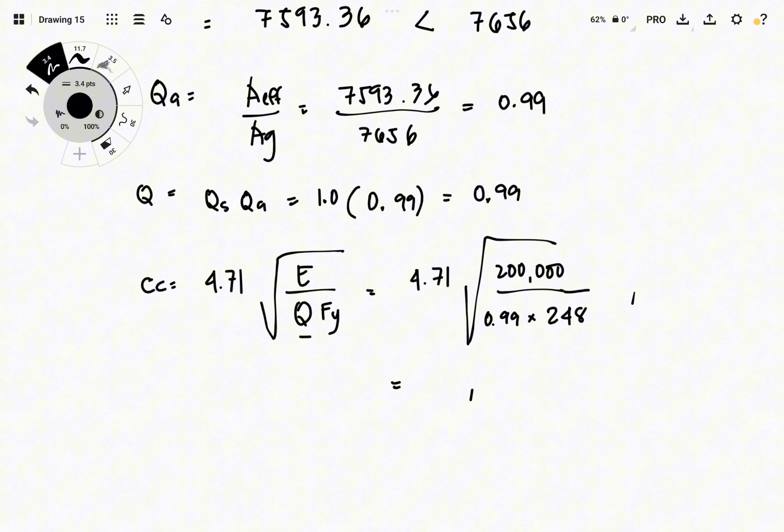134.429. At yung slenderness ratio, KL over R, hindi na magbabago yun. So, nasaan na yung nasolve natin kanina? 37.56. So, still, this is still less than dun sa CC. So, this is short column or inelastic buckling.

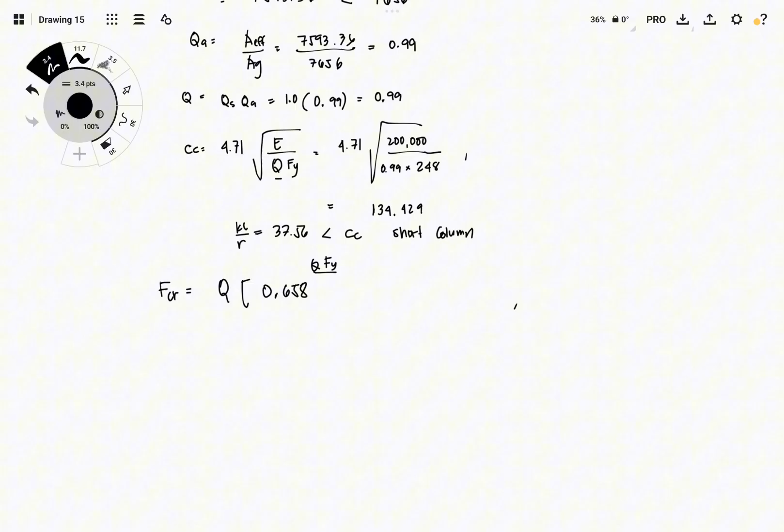Now, solving for the FCR, short column, magkakaroon na ng Q dito sa formula natin, 0.658 raised to Q Fy over Fe. So, 0.99, 0.658 raised to 0.99, at yung Fy, 248. Yung Fe na gagamitin is yung same pa din na nasolve kanina, 1399.70 times Fy. And then solving this, plugging it to your calculator, we obtain 228.13 megapascal.

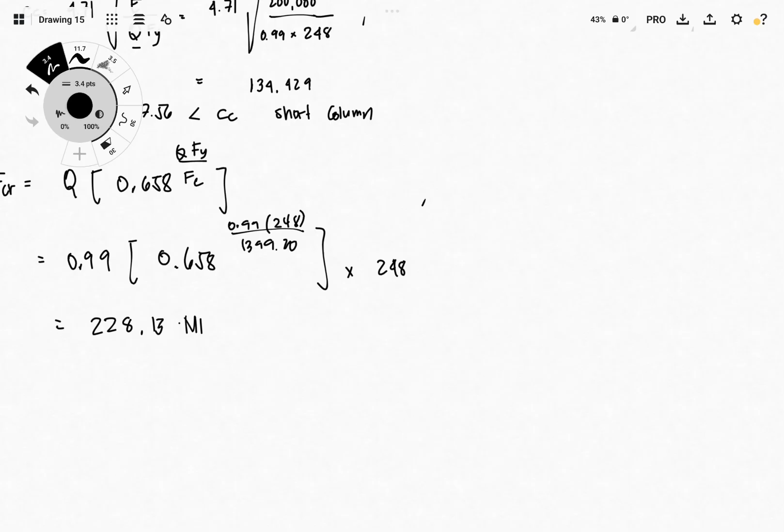So the nominal will be equal to FCR times AG. So yung AG na gagamitin is not the A effective because we already consider the reduction from the Q value, no? So hindi na kailangan yung maging AF yung gagamitin. Still, area gross yung gagamitin ninyo. So FCR is 228.13, AG is 7,656. Divide natin ng 1,000. So we obtain

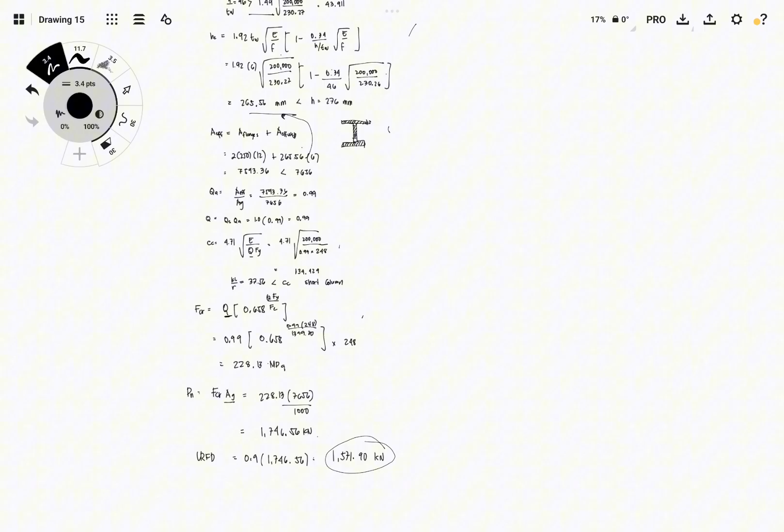1746.56 kilonewton. And then considering LRFD, 0.9, 1746.56, we obtain 1571.90. So, ang problem natin ngayon, yung sa problem na to is yung web lang yung naging slender, but we have different formula if yung flange naman yung naging slender. So, you have to review that. Baka lumabas sa prelims ninyo.